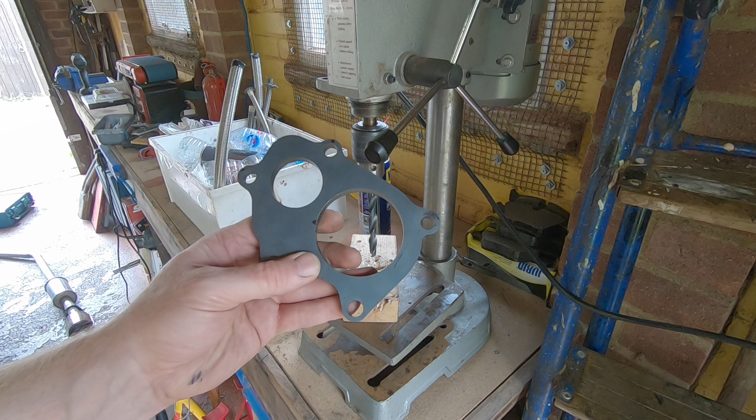So we'll start looking at the downpipe now. Obviously this is the turbo outlet flange and the top of the downpipe essentially. So these two holes here have M10 bolts going through them and they're like 11 odd mil, and these are 10.5 mil, and they go onto the studs that are already fixed in the turbo. They're a bit tight, and because these are in slightly the wrong place, it sort of jams a little bit and won't quite sit flush.

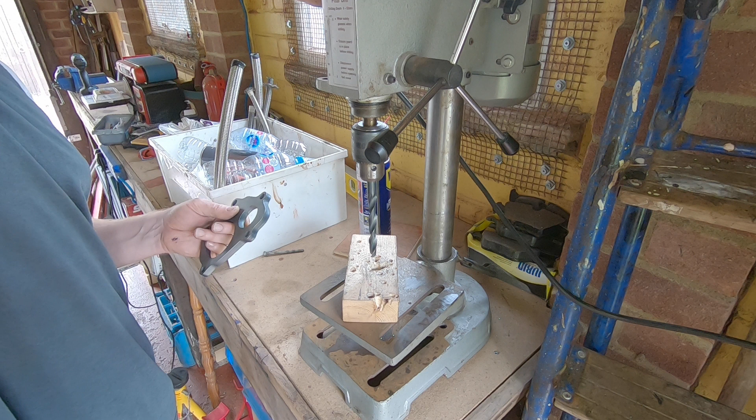So what I'll do is I'll drill out these two to 11, leave this one as 10.5, so that way that can index off the turbo, and then everything else has got a little bit of play without being able to flop around everywhere. Also need to double check the flatness of this because I'm not sure it's 100% flat either. We've obviously got to weld stuff up so it's going to shift a bit, but if it's really on the piss that might need a bit of a tickle. But there we go, two of them drilled out.

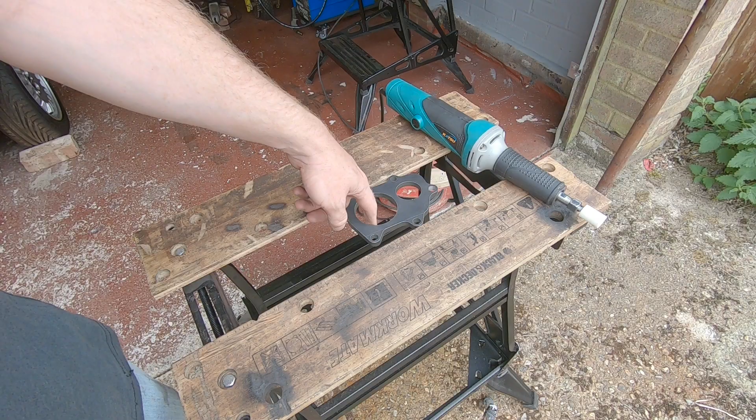Currently the hole's a little bit too small as well, so this is about 64.5 and about 64 across that way, so it barely fits in there. But you want it to go in and be tight so you can position it without falling out or falling through basically. So I've already cut back the seam to here so it drops in about halfway, but you can't get both sides in, so I'm just going to tickle it out with the grinder, keep test fitting this, then we can carry on with the exhaust.

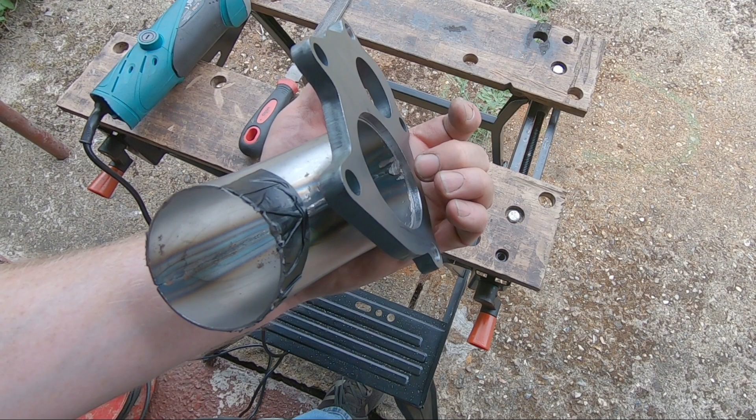Sorted, so it's halfway set into the flange thickness now. Tight enough so it won't fall out because of gravity, but loose enough you can twist it around and manipulate it whilst you're trying to figure out where the exhaust goes.

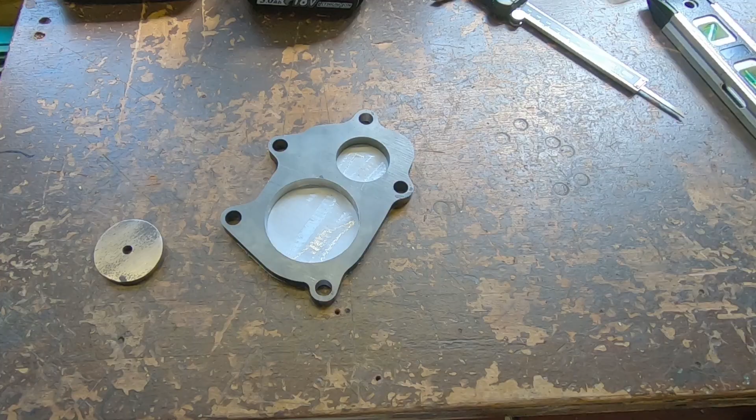So it's got a divorced setup for the pipes. So this one is supposed to feed the internal wastegate gases out separately down a pipe, which then joins up later with the downpipe. Being as this isn't going to be a huge power application and we're not in any danger of overflowing or overrunning the capabilities of the 2.5-inch downpipe, there's no need for it. I mean, Subarus run an easy 300 horsepower with a simple flat plate on here, so even with a wastegate relief there's no real need for it in this one.

So I did originally find this in my scrap bin, which is the section I hole sawed out to help with the welding of the turbo outlet flange, but that's absolutely massive compared to the hole I'm trying to weld up. Then I had a quick look on eBay and sure enough they sell everything. So yeah, 40mm laser cut disc, 6mm thickness. It's like £3 something including the postage, so at least half of that's freaking postage. So couldn't be bothered to spend 2 or 3 hours of my life sanding that to the right size. So anywho, we've got this now.

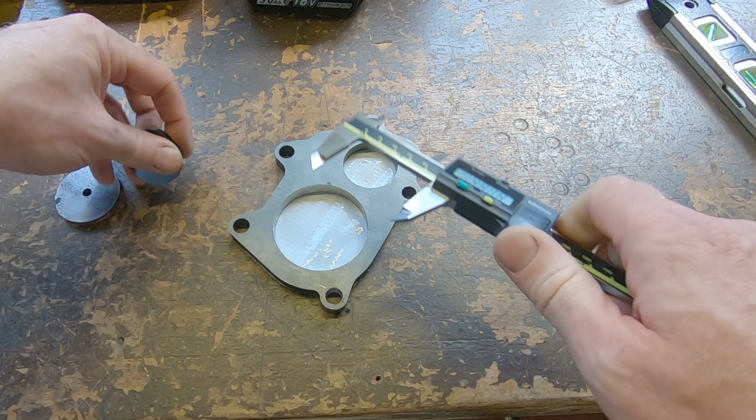So like I said, 40-ish mil disc, 39 I believe it was, yeah, 39mm hole. Oh, bang on. Oh, 39.01, send it back. But yeah, that's 1.5 inches obviously, so 25.4 plus the 12.7 comes out somewhere around 39 I guess. So anyway, we're going to sand this down on the disc sander, get him to fit in there, then we can weld him up.

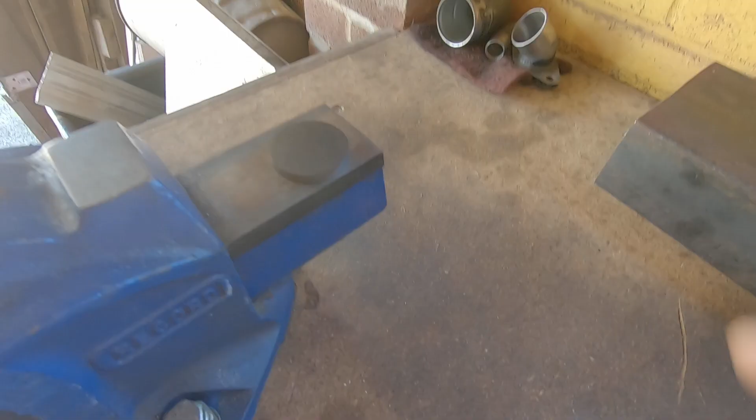The other thing to remember as well, when you're working on small metal pieces, they can get quite hot quite quickly. So if you use a larger piece of metal that's cold as a heat sink, put it on there and let it suck the heat out of it again, you can carry on working on it a bit quicker without burning your fingers.

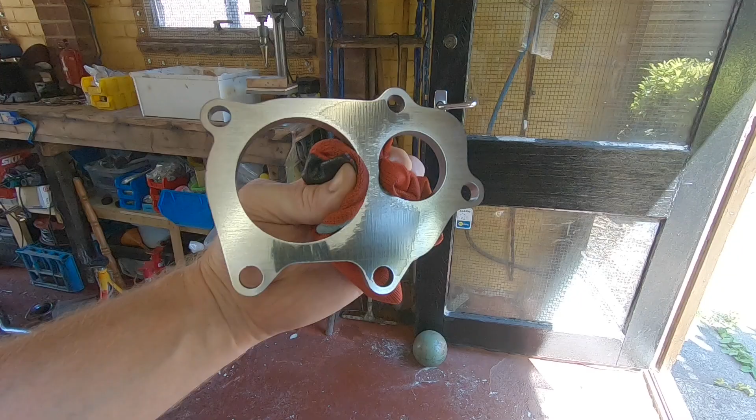So I'm just tidying up the turbo outlet flange on the linisher as well. It was a bit warped one way, so it's got a low spot in the middle, so I thought I've got to take the scale off of it anyway before I weld it, so I might as well linish it flat while I'm doing it. And the other side's obviously bowed the other way, so we'll get this side sorted for the welding and then we'll worry about the other side afterwards, because once we weld this in we may well be linishing it flat again anyway. So yeah, let's get in there now.

So I've set the blanking disc so it's flush with this surface. Tacked it twice on this side just to hold them in place.

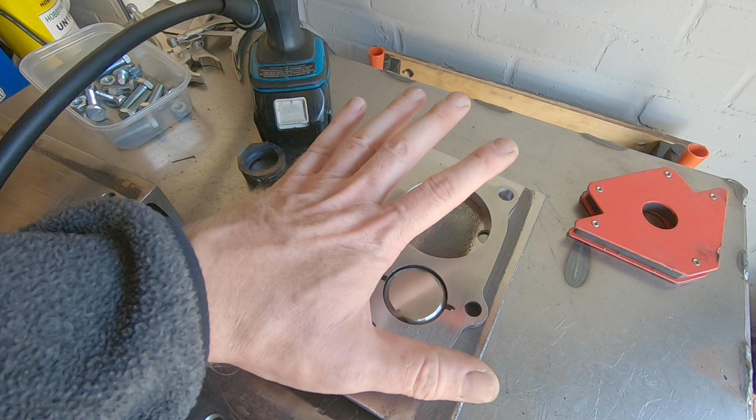The bevel here I'm going to fill in with weld, fully seam weld that side. Same on this side, nice little fillet weld on the inside. I think best thing to do, I could either drill 100 holes in this thing, but it'll carry on going like that forever, so I think I'm just going to tack weld it here in 4 or 5 places just to stop the worst of it bowing.

And it's a fairly small, sort of localized weld. It is going to have a lot of heat into it, but it's nothing compared to what we did on the other one, welding up all 4 of the actual exhaust port outlets. So we'll go with that, and I'll see you when it's done.

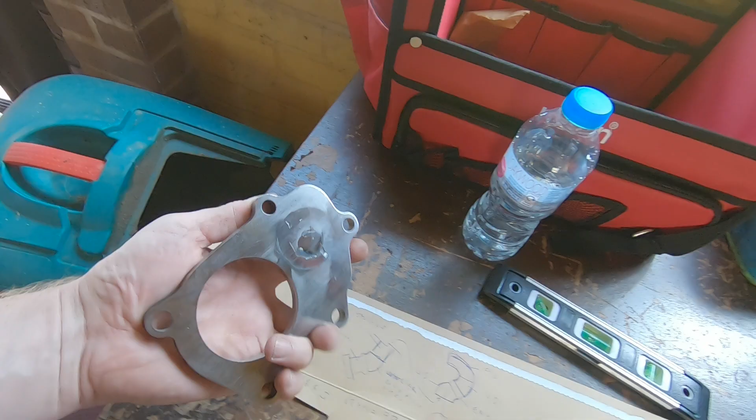So there it is, all welded up. Linished it flat again. I don't want to keep linishing it too many times because otherwise we'll end up with no plate left, but it's down to about 9.5, 9.3 now from its original perhaps 9.8 I think it started out as. So yeah, there we go. So that's ready to go on. We're going to now use the proper gasket, obviously.

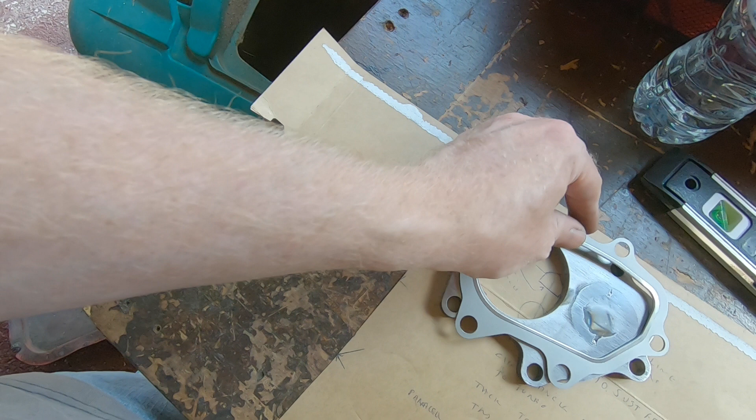So see that pops on there, proper Subaru gasket and everything, which is actually really tight to the 2.5 inch outlet, or 63 point something mil outlet.

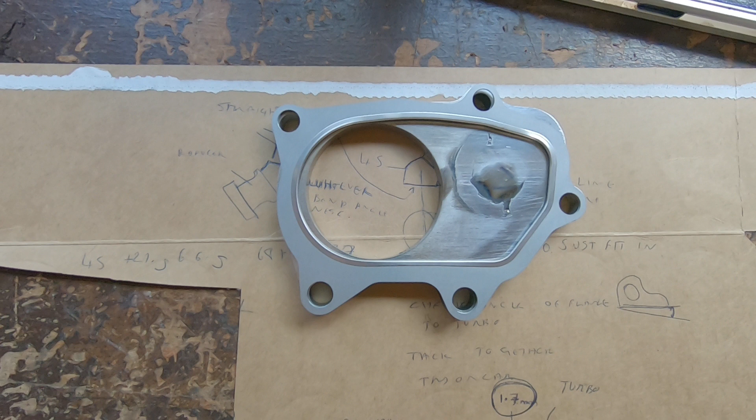So that's obviously a genuine Subaru gasket, and when you line the holes up, 4 of them line up, but this 5th one here is about 1.5 mil in this way, so looks like whoever designed this flange got their calculations a little bit wrong, but it doesn't really matter, as long as we've got clearance holes we'll be okay. So we're going to chuck this on the turbo.

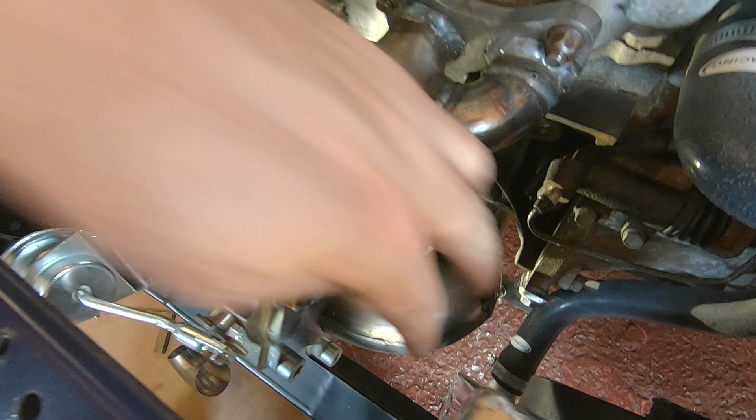Okie dokie. So we bolted up our flange nice and tight with the correct thickness gasket in it. We've now got a 90 degree coming out of here. We've got a good 25 mil clearance between here and the rad. So that's cool, and I've marked up where the seam is onto the flange plate itself, so that way we know the angle of it.

Then coming off of that I've got another 90 degree bend which is taped on at the moment. You can see the other end of it there hopefully. So it comes down here to this piece, and that's sort of rotated. I need to get that a little bit more square as we're coming towards the entry to the downpipe. Currently this is too long.

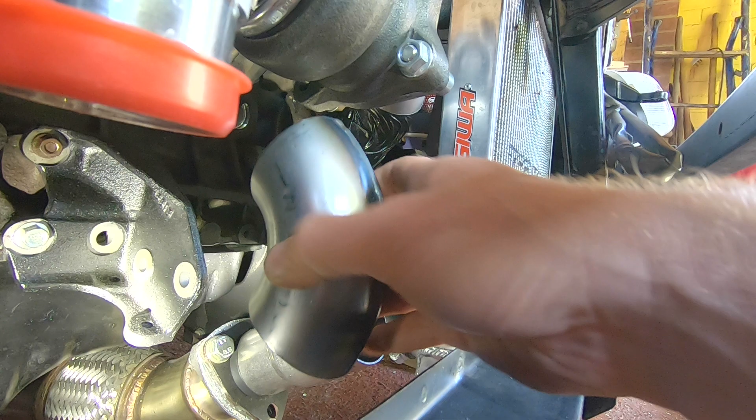Scoop you under here a sec. So I've put some tape around here just to wedge him in there, and it's set pretty square in both directions. So now all we've got to do is basically join the second 90 from the downpipe to this piece here with our other 90. Now that's obviously going to go in there somewhere like that, but I'm working out what I need to do. This needs to be cut off at a bit more of an angle so it mates up square with this, and then we're going to put a straight section in here.

So this needs to be trimmed off. That'll be the angle there. We'll turn the 90 degree bend until it lines up top edge of this square with top edge of that. Then hopefully the exit from this to the entry to that through a little straight ring section will then mate up lovely and be perfectly easy to weld without any problems at all. So I'm going to carry on and make all of that happen.

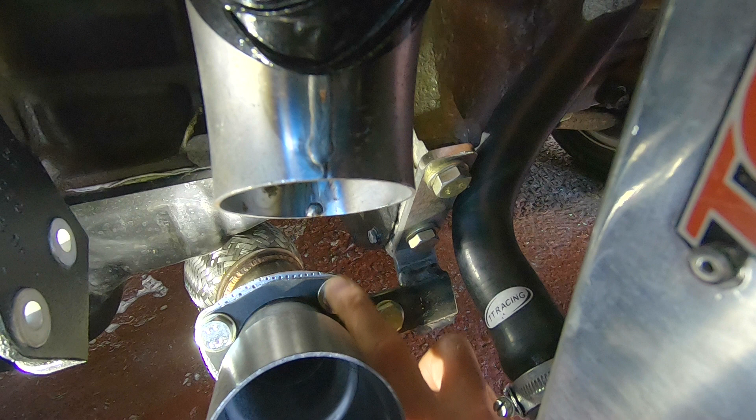Of course, the other thing you've got to be aware of is, can you get access to stuff? So yes, I can still get a spanner on this piece. If I go across the top here, I can just about get a spanner on there as well. It's not great, but I can. Also, I have got some offset ring spanners, but I need the clearance to get the ring in there. And like I said, if we do get in trouble, we can always put a socket cap head in there because it's a smaller head, and with a wobble drive or a ball end or something, we'll be able to figure something out. So it's not a problem.

I didn't really want to go with M8s. Sometimes you have to switch down to an M8 because they're easier to get in the holes. But either way, this is how it is when you're trying to put an M10 on a 2.25 inch lower flange. So yep, something worth checking. And also we've got this bolt up in here as well, and you need to be able to get a spanner on that from below once your downpipe's in.

And also be aware of where your oil drain is. The drain's going to come down from this face of the turbo, stay on this side of the plate, and then enter into the sump somewhere about here. So we're well clear of all of that shenanigans.

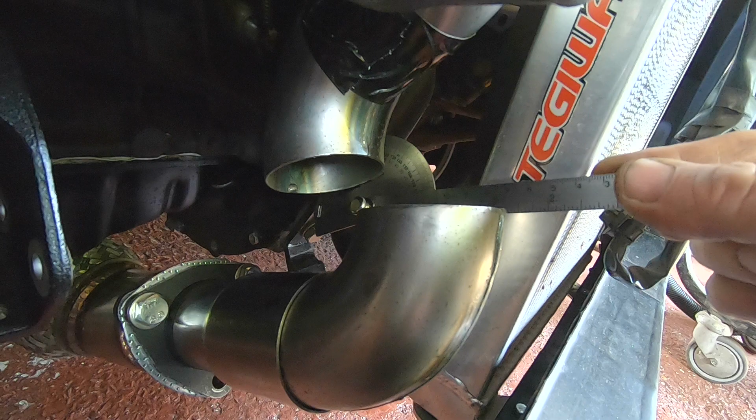So after lots of umming and ahhing and messing about, I figured out the angle difference between the two tubes is about 12.5 degrees. So I still need to shorten this up, but now I've got an idea. I can cut the section off of this upper piece now. So yeah, that's it for day one. It's definitely time for a shower and a cocktail, so I'll pick up with you guys in the morning.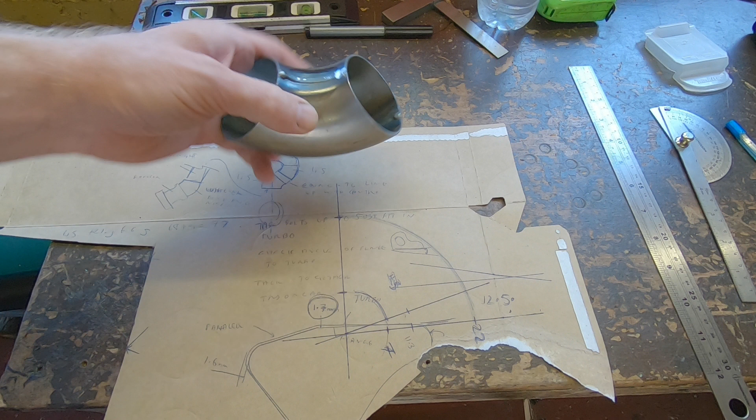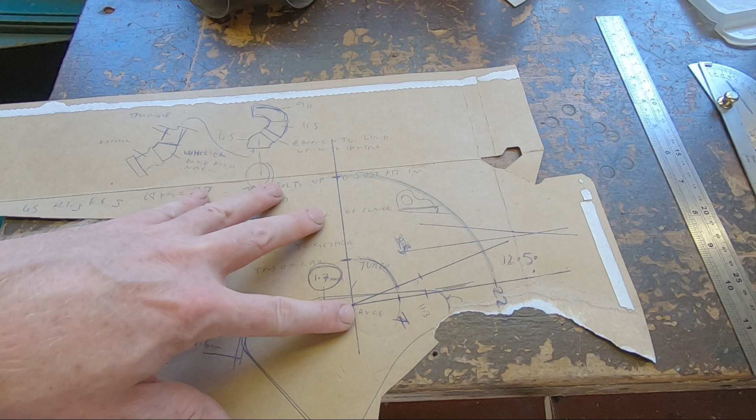Okay, so I've had a bit of a scribble, drawn up my pipe essentially. So I've got to cut a 12.5 degree angle on the bottom of this, so it'll line up with the pipe that's joined up to the centerpiece. So basically I've drawn it out. Obviously it's 90 degrees from that face to that face, and those are the inner and outer edges of the pipe. So I've drawn up my 12.5 degrees. Obviously it's important to get it from center.

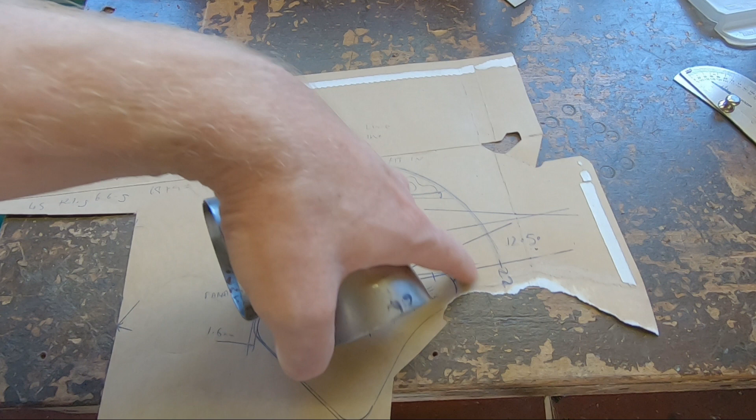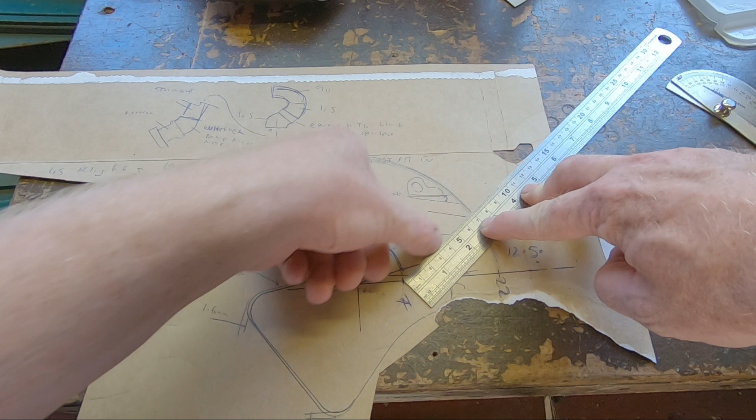So if you try and cut your 12.5 degree angle from, say, the bottom edge here, when you cut that, you'll obviously end up with an oval shape because you're not cutting from the center point of the actual pipe's bore. So long story short, if we measure up, say, a 12.5 degree angle from the bottom corner, we end up at 66 millimeters. And just to show an extreme example, if you're going for a huge angle and you choose to chop there, you'll end up with the section this way being 70 odd, and the width of this is actually 64. So it's important to take your cut line from the center point.

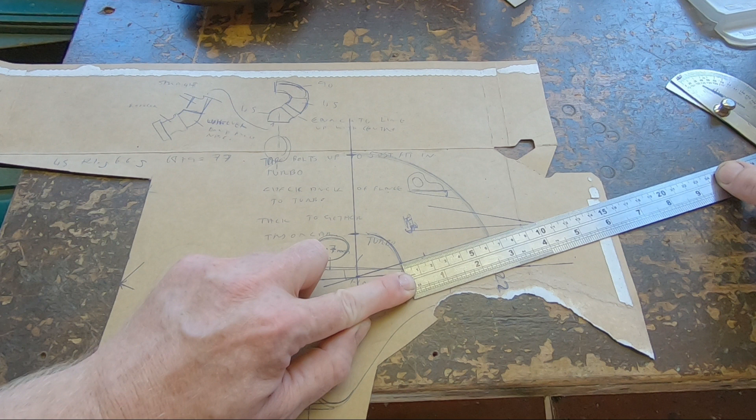So anyway, from the center, which is obviously where these two points intersect, and if we measure across there, that length, 64.5, 65 mil, which is obviously my bad compassing there, but yeah, so that's 64. So what I've done essentially to try and make this a bit easier, I haven't got anything cleverer to hold this or clamp it or cut it, so I'm gonna have to chop it with an angle grinder basically. But if we measure up what we've got across the bottom,

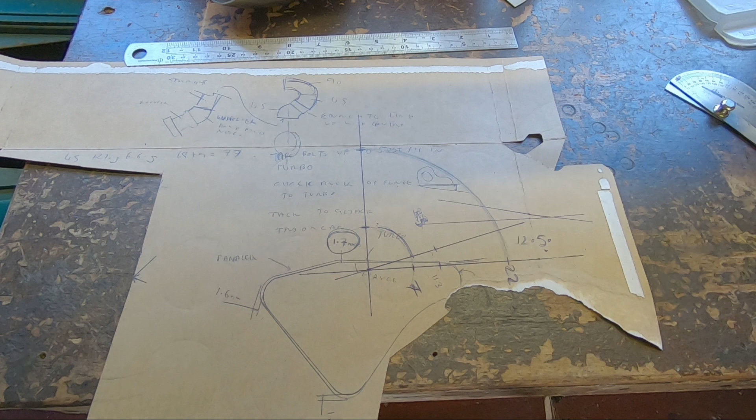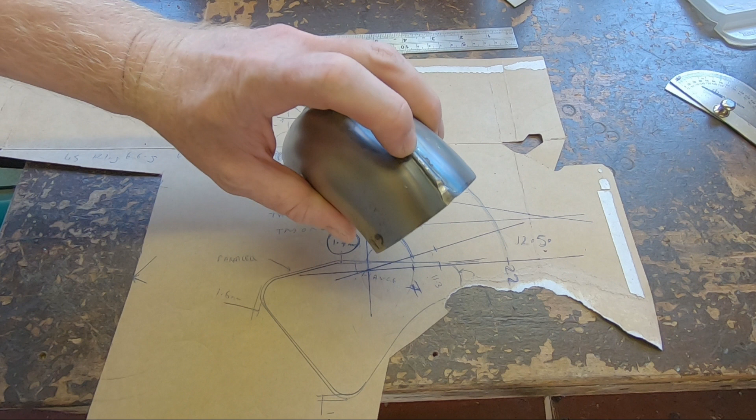I've measured up here, which is obviously this section of the inner pipe, and that comes out to about 7 mil on the drawing. Then we need to measure up the back edge, which is 22, and then we need to find the halfway point on here and then measure up between there, and that'll give us how much we need down the side. So if I mark out 7 mil this side, 22 mil on the back face, and then quarter it to find the quarters, then I can measure up whatever that part of the angle is. Then I'll know that once I've chopped this off roughly with an angle grinder, I can sand it down on the belt linisher, and we'll end up with our 12.5 degree angle cut, and it should still be round, and this should still measure 64 across here.

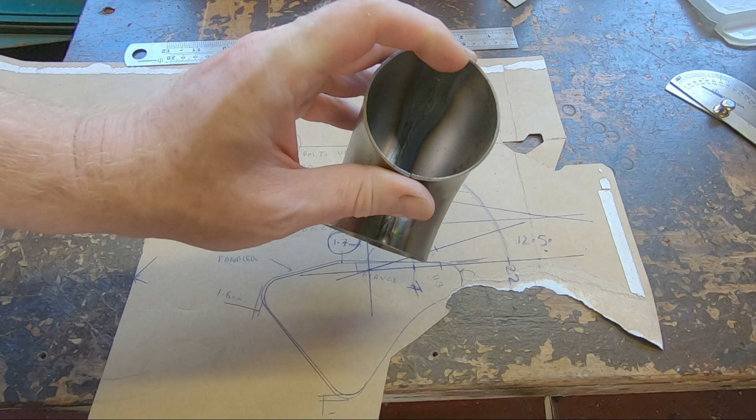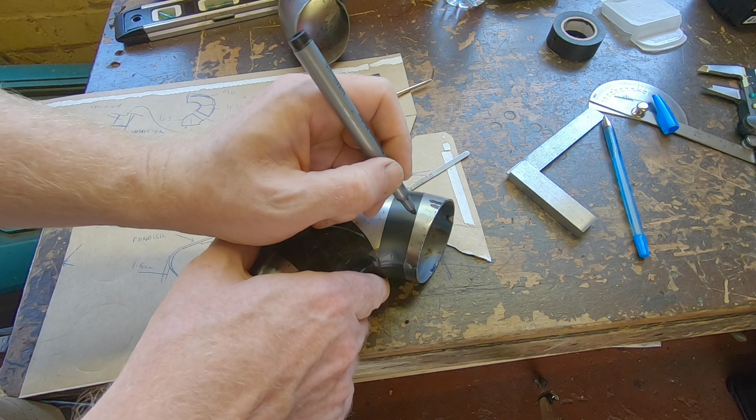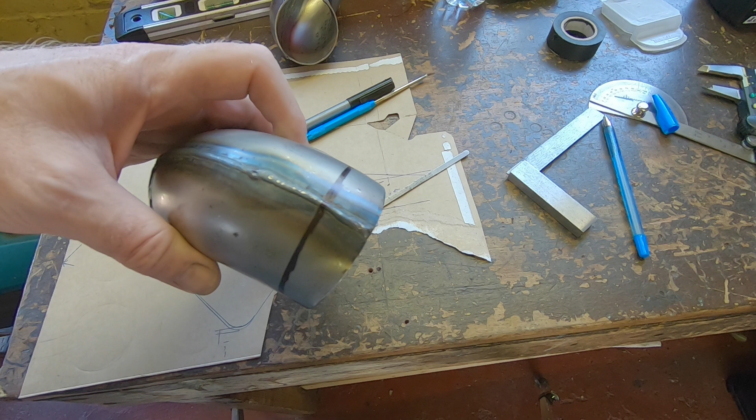So there we go, all taped off. 7, 15, 22 on the back. It's pretty straight, didn't do too bad a job, so that's pretty straight down to our center. So I think probably what I'll do is draw myself a line next to it, or at least covering over it. That way I can take the tape off, because when you cut it, the tape's just going to melt and burn out of the way, and you never know where you were. So we go around that with this, so we can peel that off. We'll have a nice sharp line. Once we've sanded away the line, we know where we should be. So, not bad.

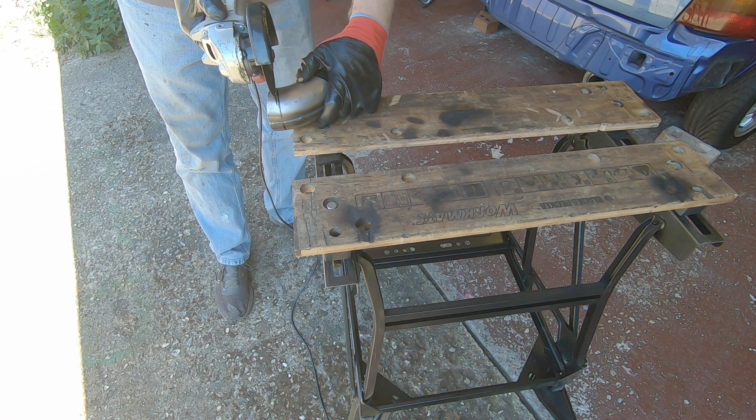So we've cut the angle on the bottom of this pipe, and that's now back in. We now have the bottom half we're trying to join up to it. So I've shortened down the reducer a bit here, took about 10 mil off of that, and that's now back in. So we just need to have a quick measure up to see how far off we are, because I don't think we're too far away from being good here. We sort of straighten up and push that at an angle. You can pretty much see that's gonna line up pretty good. We've just got to go that way now.

So if you pop under here, obviously this isn't very easy to measure on camera one-handed in an engine bay, but I have measured up essentially. If I put that on sort of 51-ish, which is about 2 inches, and then put my thumb by the mark, it lines up to about the 4-inch mark. So basically we're starting at about 2 inches there, and the other end of this pipe is about 2 inches. So we're going to take 50.8 millimeters off of this straight section here,

and thankfully there is that left. Now we've moved it in, this goes that way, this then lines up with this, and you never know, we might be able to use that ring there as a slip joint over the two of them, or we do have a nice piece of straight over there that we can cut a little ring out of. But like I say, once this is in the right place, it'll be a lot easier to measure the gap here, which looks about, yeah, just about 2 fingers worth. We're going to give this a trim up, 50.8, exactly 50.8.

So that'll all be coming up on the next episode of Dan91's Garage, where we finish the downpipe.